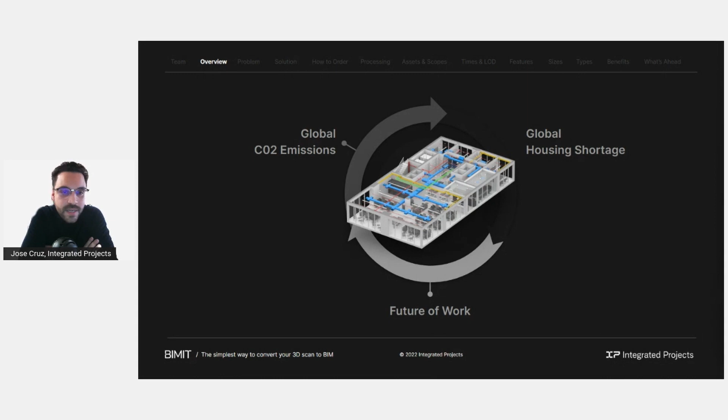146,000 buildings a day that require us to upgrade those buildings. We're not even close. But if we were to achieve this, it'd require an interconnected network of owners, design professionals, contractors, financing providers, federal, state, and city governments in systemic lockstep. These challenges are too large for any profession, and certainly any one company.

We play a small part in a much larger, more complex puzzle to help owners identify what they own so they can effectively upgrade their buildings. We use a simple 4-part framework to capture, convert, visualize, and connect those spaces.

Capture refers to reality capture, using 3D scan technology to accurately depict a space digitally. Convert refers to turning those 3D scans into information models, that is, the files that can easily be used by an architect or an engineer in industry-accepted formats like Revit, CAD, and IFC.

Visualize. Did you know 99% of our owners and non-technical clients will never actually open up a Revit or a CAD file, nor do they care to? So we're investing a lot of our resources in building visualization software to abstract the complexities away and give users the information they need in an accessible way.

And finally, connect. Once a building has been digitized, it's been effectively brought online. This means the ones, the zeros, the geometric data from the building can be relayed, connected via APIs from one stakeholder to the next. So today, I want to speak about the first 3 pillars, and we'll start with capture and convert.

3D scan technology is nothing new. BIM is nothing new. And scan-to-BIM certainly is nothing new. And yet, I'd suggest the careful and systemic integration of these 2 is the key to accurately benchmarking the built environment.

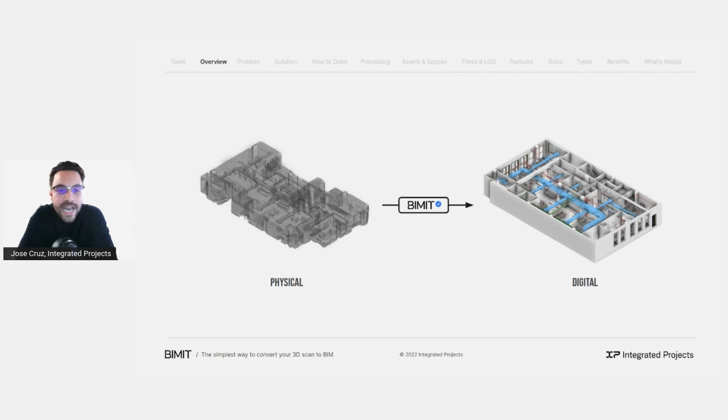To add to this, scanning is the first step of a two-step process. The outputs that these scan devices create are point clouds. With these point clouds, we can model and train deep learning algorithms to create architectural, mechanical, and furniture 3D components. To use an analogy, point clouds are like the crude oil, and BIM is the refined oil. You can't have refined oil without extracting it first as crude oil.

Similarly, we can't have accurate BIM without accurately capturing the raw 3D scan data. The problem: architects and engineers are often being asked to perform design services on bad, inaccurate, or non-existent existing conditions data of a building. This means getting accurate plans falls on the laps of designers, even though that's not where their value lies.

Here's what one BIMIT user tells us, echoing what we've heard across the entire profession: Creating existing conditions drawings is not a value add task for a designer. It's not why a client would hire us, and yet it's a necessary step to move the design process forward when starting a new project. BIMIT helps us maximize the project time we're given to focus on design exploration, not wasting 30% of our billable hours just creating existing condition plans.

A typical workflow for an architect or an engineer that has already 3D scanned their space looks something like this. They have to make a decision: do I model this project in-house and waste our billable hours, or do I outsource this to a scan-to-BIM shop and hope to get a clean model back?

Assuming they outsource, they're now trapped in a typical workflow of procuring a scan-to-BIM service provider. They have to jump through the hoops of contact forms, emails, intro meetings, scoping out the project, defining it, getting an estimate, negotiating that estimate, negotiating the contract terms, and finally sending your scan to get modeled. Before you've even started the work, you spent 1 to 2 weeks just trying to get it off the ground.

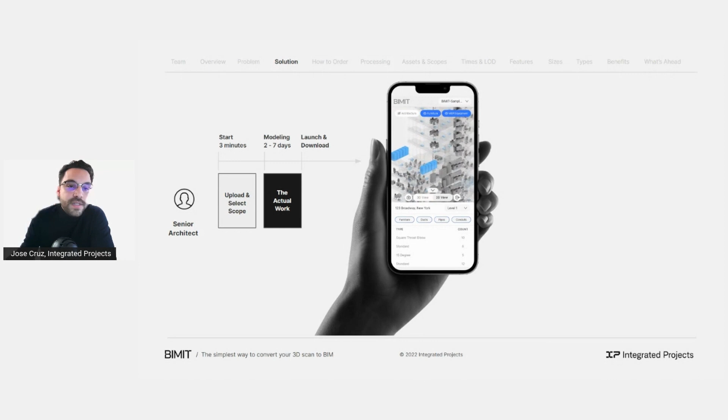To start, you could just go to our website, upload your registered point cloud, select your scopes. You'll notice that even for complex industrial spaces like mechanical rooms or boiler rooms, we've created its own category that can be toggled on. You'll notice we provide upfront pricing and an estimated delivery time, so you can budget even ahead of your project.

At checkout, we present your BIMIT order summary and a simple and secure way to pay, 50% upfront and 50% upon completion of project. We even created a 1-hour cancellation window for a full refund of the initial deposit in case you change your mind.

When the project's been complete, you'll receive an email. There, you'll be able to download your existing conditions files, as well as launch the BIMIT viewer. It's pretty magical. It took a lot of hard work for the team just to make it this simple, but here we are.

And now, based off the scope selections, your BIMIT project can take on a few different configurations. For those just needing the architectural backgrounds, you'll have the option of simply converting your architectural scope, essentially your base building. For those needing furniture and mechanical systems, you can include those as add-ons as well.

Of course, there's a caveat here. We can only model what's clearly visible within the point cloud. So here's where the nuance and the specs behind the 3D scanning camera you might use does matter. For example, I probably would not suggest 3D scanning a 30,000 square foot office with your iPhone. Your point cloud will likely have too much drift and misalignment to be a reliable input for BIMIT.

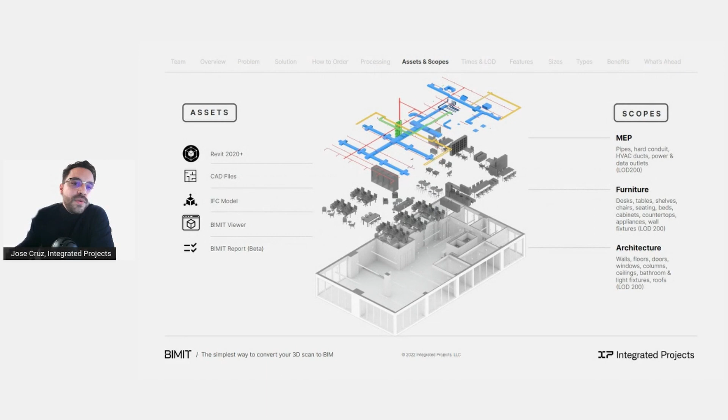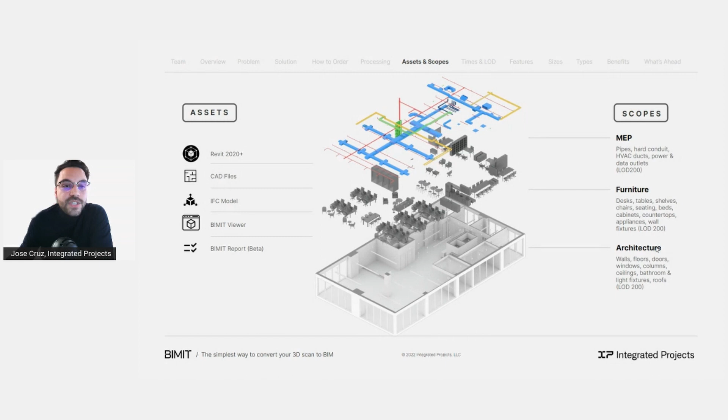When you unpack BIMIT, you'll receive the following assets and optional scopes. All BIMIT orders come with Revit, CAD, and IFC as standard. If you requested MEP scopes, your order will also come with reflected ceiling plan DWGs. All projects include the BIMIT viewer, and coming soon, a standardized location report providing floor plan PDFs. For those wanting to dive into level of development tables, we've made those available within the BIMIT order page. These spec docs clarify how we've defined those scopes and their respective detail levels—so if you're wondering whether light fixtures fall under architectural or furniture scopes, you'll find your answers there.

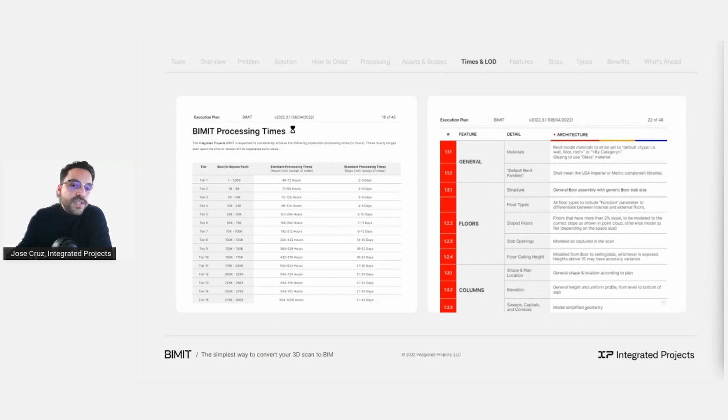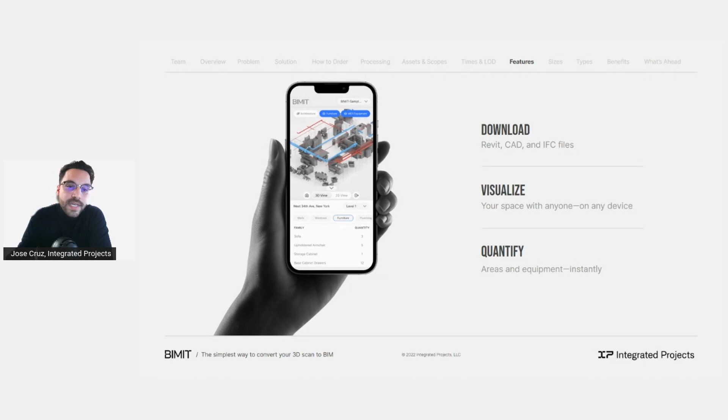Collectively, BIMIT aims to address some of the most basic but fundamental challenges we face. It helps get accurate information on your space in an easily readable file format. It helps visualize that space with anyone on any device, and it helps quantify those spaces and the equipment within them. We've got a lot of work to do, but this has proven to be a good start.

All scopes are delivered at an LOD 200—that's industry speak for the level of development or detail within our 3D models. To be clear, our BIMIT models are modeled accurately per the registered point cloud provided to us by the client. This means all model elements are graphically represented within the model as a generic system, object, and assembly with approximate quantities, sizes, shapes, locations, and orientation.

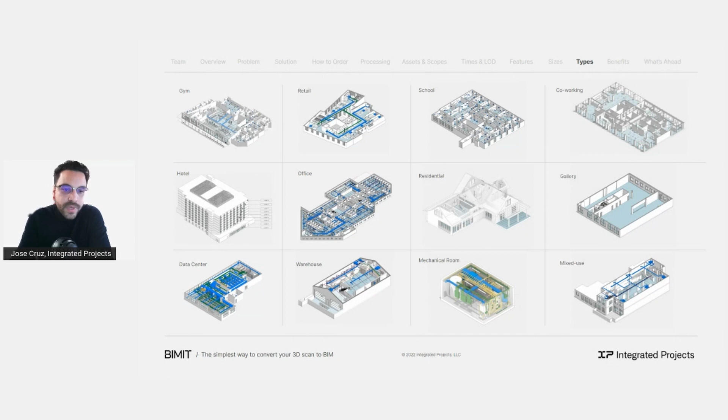Our aim with BIMIT is to get your project team on the 50-yard line. We'll never replace field verification, but by following good scan practices, using the appropriate 3D scan devices, and using BIMIT, you'll get construction-grade results.

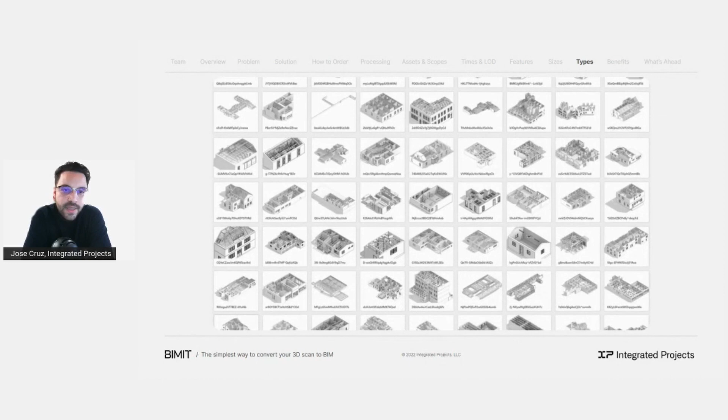In 2022, BIMIT digitized over 1,600 buildings of all types—a 300% increase from last year. It's absolutely humbling, this milestone, and I think it speaks to the broader urgency of accurate information in efforts to solve more urgent challenges.

But this milestone is a drop in the bucket. In Q4, we averaged approximately 6 buildings a day. Even if we were to grow that to 60 buildings per day, it might be great for a self-funded startup like us, but it's a blip in the global mandate to digitize and decarbonize 146,000 buildings a day. But of course, we have to start somewhere.

So today, BIMIT delivers in hours, not weeks or months. It's got low, predictable costs. It provides 3-in-1 services from architecture, furniture, and MEP. It provides the groundwork for accurate building data and dimensions. It's delivered at a standard LOD 200 level, and it's reviewed and QA/QC'd by our senior architects and engineers before the project ever gets back to you.

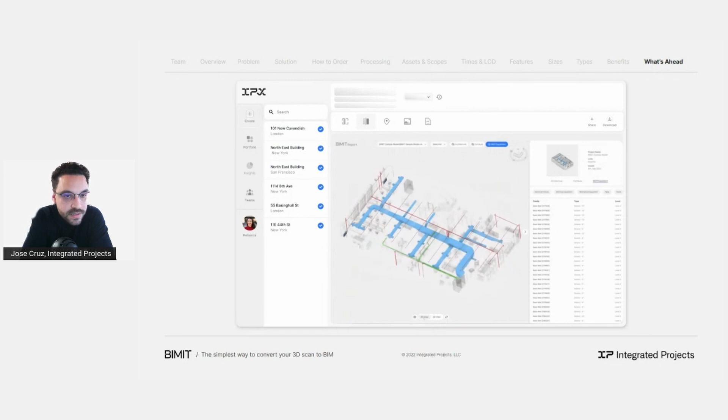As users go from a single project to multiple projects, we're excited to roll out the next generation of IPX next year in 2023. From IPX, users will be able to request new services, view, share, download, quantify, and connect their spaces with anyone securely.

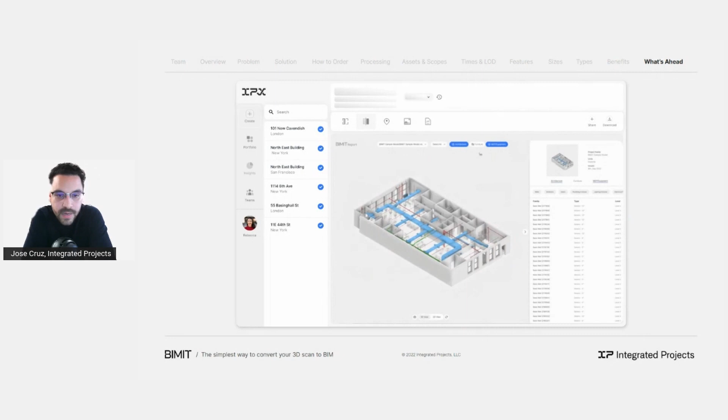The number one comment from our owner-operator clients sounds something like: now that I have my building digitized, can I find an architect to redesign my 7th floor? Or can I find an engineer to help me with Local Law 97 compliance? Or can I overlay my IoT sensor data on top of your interface? This is going to take the form of a marketplace of services that can be built on BIMIT. We're actually taking early applications from design firms, prop tech companies, and other services that may want to add value to our existing BIMIT owner and operator users.